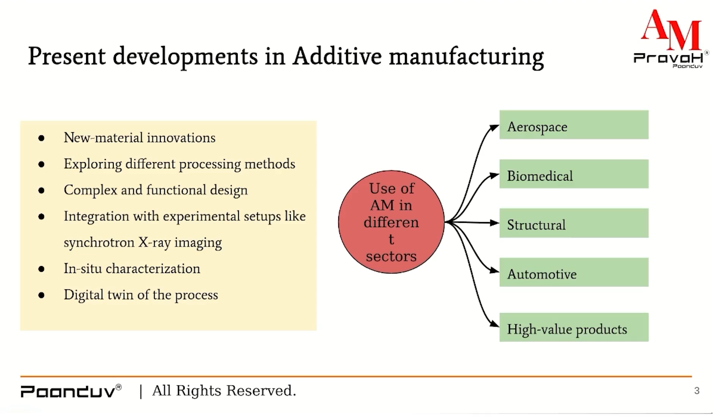In situ characterization, where again, this characterization business is a long drawn out process where you print coupons, you send it for printing. Characterization happens using different imaging techniques. Can we reduce that cycle time and try to do it in situ? The last one, which is slightly touching upon the process of simulations, is creating digital twins of the process so that you can reduce a lot of trials and errors that go behind the whole experimentation process and the real production development.

I will talk about a few interesting case studies, and of course aerospace has to be there. So this is a bleed air leak detect bracket, developed by Lockheed Martin and Oak Ridge National Laboratory in the US. It was a part of the engine for a fighter plane, and you can see the very complex part on the bottom right of the screen here. I hope you will appreciate the complexity of this particular part.

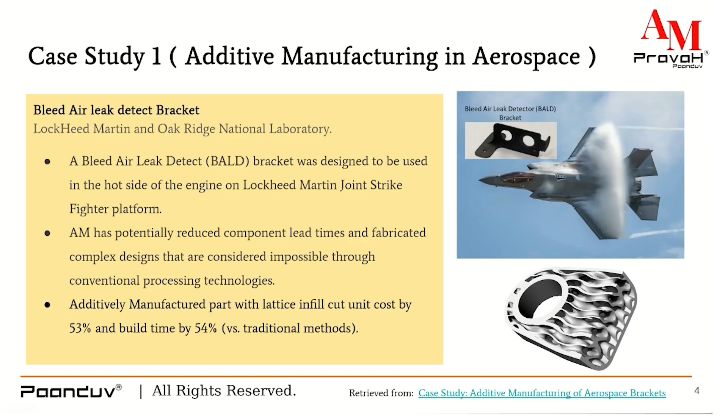And when this part was manufactured additively, the build time and the cost were both reduced by more than 50% when compared to the traditional methods. So this is a huge saving, not only from the cost point of view, but on the time point of view as well, while maintaining the structural integrity of the part. It's not that you are removing material and hence you are losing on the strength of this material. So these sort of complicated parts using very high performance alloys can be developed, can be printed using 3D printing process.

Another industry which, to my surprise, is heavily using additive manufacturing is the biomedical industry. Recently, there was a case with a friend, and even in tier 2 or tier 3 cities, when you go to a doctor and if you want a tooth replacement for X number of reasons, the dentist would recommend, would you like a 3D printed tooth replacement for your particular tooth?

And that has become a possibility, and it has reached the actual end user. So similarly, what we are showing here is a mandible reconstruction using titanium based alloy, using additive manufacturing. And then when you use traditional methods, there are certain ways of doing it. So when you do it using additive manufacturing, the implants are very patient specific. They fit well to the patient's bone structure right away, and there's not a lot of readjustment that is supposed to be done.

In fact, one of the very cutting-edge research areas that I saw recently at one of the other talks was, when a bone breaks from the middle altogether, then they're trying to find some additively manufactured materials which can replace the actual bone material in between, and that amount of porosity that you need inside that particular additively manufactured bone should be such that it should allow for the nutrient passage from the neighboring bones. So that is a level of complexity that we are reaching.

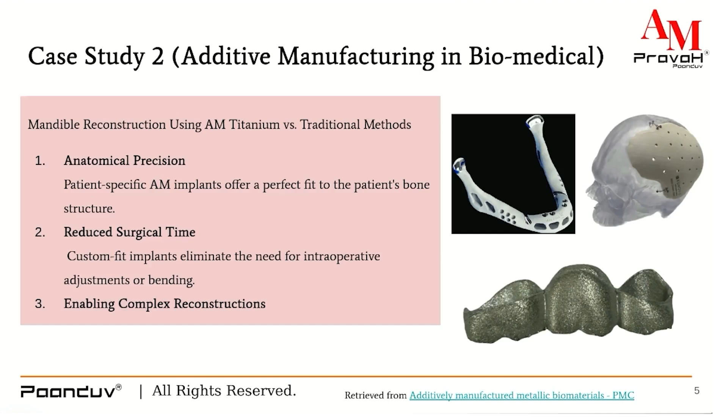Of course, it reduces the surgical time because the custom fit implant just fits right away. There's no adjustments needed later on. There's no bending involved, and hence the overall patient experience improves. And again, whenever there's complexity, it's a natural choice. And human body is quite complex. Each patient has its own complex bone structure, body structure, and so additive manufacturing is an organic choice for that industry as well, biomedical industry as well.

But again, I mean, it's not as mature of an industry as we can talk about, automotive or defense. So there are certain reasons why we are lagging behind when it comes to additive manufacturing and complete adoption of this technology. And one of the main reasons is lack of technological infrastructure, lack of characterization facility and instrumentation. I already pointed out that characterization and instrumentation is a very necessary part of any additive manufacturing part production, especially in the R&D phase and then also in the production phase.

There's lack of skilled personnel, lack of indigenous resources like powders. This is something that most countries all over the world are having problems with. Generating atomized powders using plasma, gas, or water is not a very straightforward process. The technology in itself is quite complicated. Therefore, it becomes important for everyone to investigate how they can indigenously develop their own powders that are spherical enough. Ignorance of using physics assisted tools for prediction.

A certain amount of confusion has been created in the market in the name of simulation softwares that can do additive manufacturing processes. But as we will go through this over the course of the next 2 days, our goal would be to make you appreciate that additive manufacturing is a very physics heavy process. You cannot simply ignore the physics and the engineering that goes behind manufacturing these machines, manufacturing these parts, and hence this understanding is quite critical in wider adoption of additive manufacturing across industries.

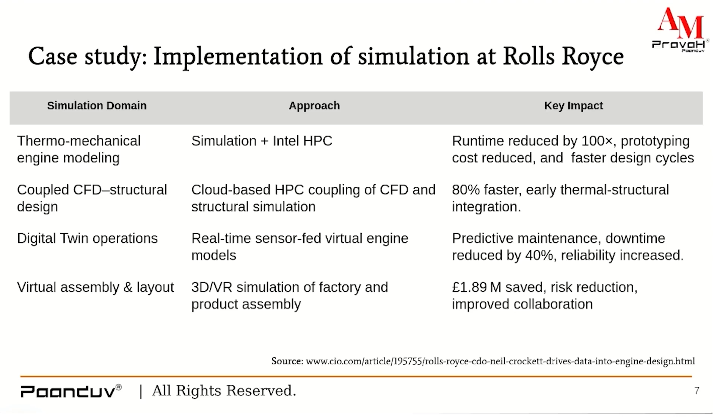And when I talk about numbers, they were saving 1.89 million pounds just on this single project, and they do probably tens of these projects per year. So overall, if I were to give you a synopsis of how the simulations are affecting the industry, Rolls-Royce has successfully used simulation, is currently using simulation-driven engineering, and there are thousands of companies using these sort of simulation software. NVIDIA and BMW heavily collaborated to drive the future of manufacturing by using very realistic digital twins and virtual worlds.

SpaceX is using simulations, high performance simulations in their Falcon rockets and Dragon capsules, and 50% increase in throughput just by using simulations. So all in all, this case is well established that when you are using simulations for improving your engines, for improving the aerodynamics, for the flow mechanics around your high performance parts, then why can't we use simulations in manufacturing as well, which are anyways ending up in the same high performing parts.

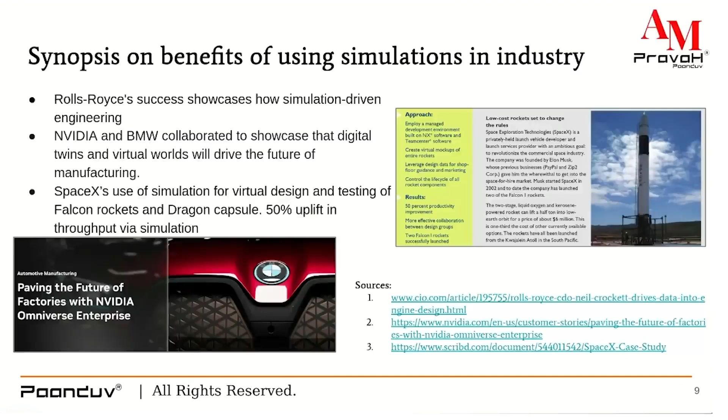It gives complete prediction of the process, complementary to in situ studies. It provides very in-depth 3D information, which is both spatial and temporal in nature. These LPBF processes, they could be operating at thousands of degrees. And it is very difficult to put any piece of machinery around those high temperatures and really look inside the porosity, inside the melt pools. And even if you can do that, you can do only as much. You can probably do few experiments in a year. You cannot be doing 100 experiments in a day. It reduces overall expenses on experiments, trials, and errors, and it adds to the value of the researchers with a complete end-to-end physics assisted solution in process modeling and microstructure evolution.

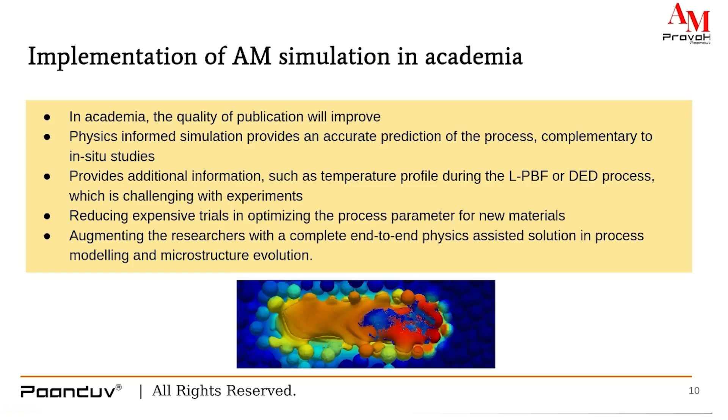Now, when we take this result to industry, the primary goal is money, saving money. The primary goal is saving wastage and reducing the run times. So AM simulations directly impact that. It minimizes the reliance on extensive experiments. It improves the overall throughput of your manufactured parts. It reduces component wastage, better optimizes your process parameters. Let's say there are 100 process parameters that you want to change for a new material. Just imagine the amount of complexity, how many permutations and combinations you will have to go through to really optimize and come to the right set of process parameters.

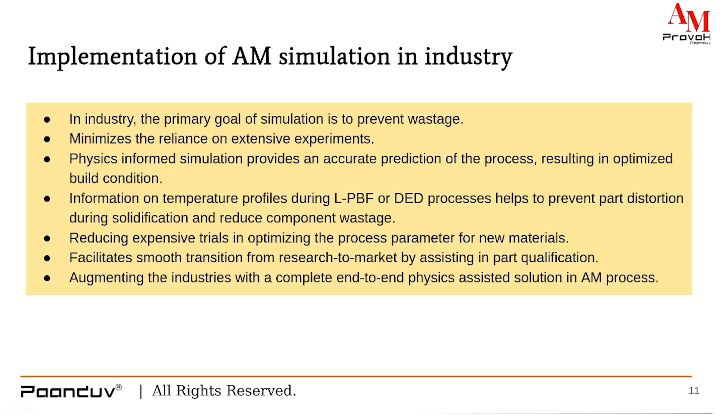And then also this simulation software, this is a very critical point, and touches upon the collaboration that I earlier talked about. It helps in a smooth transition from something that you have developed in your research lab and takes it to the market in a better manner, because it assists in part qualification and certification as well. So overall, not just academia but industry can also directly benefit from these sort of simulation tools.

There are a few myths about simulations. I want to clarify them before moving forward. Simulations are not a replacement for experiments. They are just a complement to experiments. So let's say you are doing 100 experiments in a year. Please don't think that simulations are going to remove all 100 experiments.

What simulations can do are two things. One, you may still do 100 experiments, but another 1,000 virtual experiments in a simulation software. So total you will end up with 1,100 experiments. Or alternatively, you can do 50 experiments still. Remaining 50 you can do with simulations. And based on the understanding from these simulations, you can devise your experiments in a better manner.

But in no scenario are we getting rid of experiments altogether. Another myth: all simulation softwares do the same thing. No, that is not true. They operate at different levels of accuracy. They use different methodologies, and they have different goals for the customer.

A simulation will always produce a precise, or I would rather say a correct, answer to the problem. No, that is not true. Due to the lack of certain properties, lack of process parameters, or just inherent inaccuracies in a simulation software, you may always end up with a certain error.

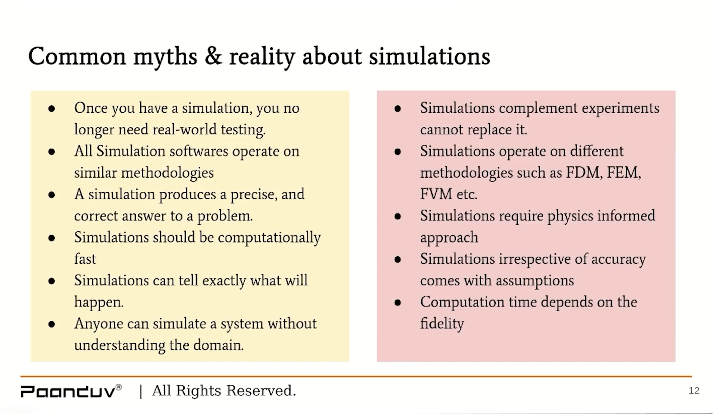This is an informative slide for those of you who are interested in any sort of simulations. Out of many approaches, and there are newer ones as well, the very classical approaches to solve an equation of physics are the finite element method, finite volume method, or finite difference method. Specifically, in melt pool dynamics or additive manufacturing problems, you're not only solving the three classical equations, which are conservation of energy, conservation of momentum, and conservation of mass, you're also dealing with phase change. You're dealing with multiple fluids simultaneously. You're dealing with a lot of laser and optical physics, and all this is happening in a very coupled manner.

You are dealing with solidification, melting, vaporization, keyhole formation, surface tensions, and electromagnetic forces when we talk about wire arc additive manufacturing. So these things can be handled by computational fluid dynamics quite effectively, given that you appropriately modify the equations and append the new equations as needed for the additive manufacturing process.

So, in very layman terms, they all use some sort of elements. They all discretize your entire volume into smaller volumes. For example, finite element uses triangles. Finite volume could be using hexahedrals or triangles. Finite difference uses very regular grid points; unstructured meshing is typically not appreciated with finite difference methods. The flexibility of discretization also varies among the three methods.

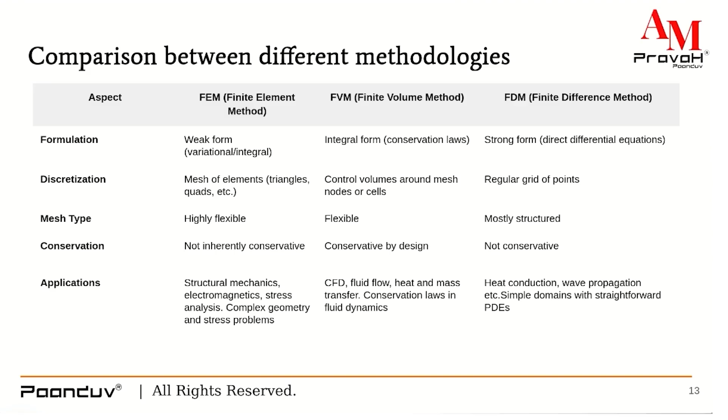When it comes to finite difference method, it can again handle slightly simplistic problems such as heat conduction, wave propagation, but also used in the CFD industry. So next time when you're considering using a particular AM simulation software in your additive manufacturing research, try asking that particular person or that company as to which particular technique they are using. Are you using FEM? Then you know what you can do with FEM. There are certain limitations. If they're using FDM, then you know what they can do. And if they're using FVM, then you know what they can do. So that sort of information should be asked.

So that was all on the melt pool dynamics, but a big chunk of additive manufacturing research goes into microstructure simulations, grain morphology, and there are many methods for that also. Monte Carlo Potts method, CA, which is cellular automata, and phase field methods. Again, they all try to address the microstructure aspect, but with the increase in accuracy of one method, its performance significantly goes down. So let's start with the phase field method, which is the rightmost one.

Its PDEs, or the governing equations of microstructure, are derived from a free energy functional. The time scales are very physical time scales, the real process that is happening. Computational costs are very high; not high, they're extremely high. And that is one of the biggest points of discouragement as to why phase field modeling cannot be used beyond a few microns around the nucleation of the solidification field. Interface accuracy is quite accurate, and this is on paper the most accurate sort of method. But when it comes to real application, industry, or research, the limitations on the computational cost are significantly high to make any real value out of it.

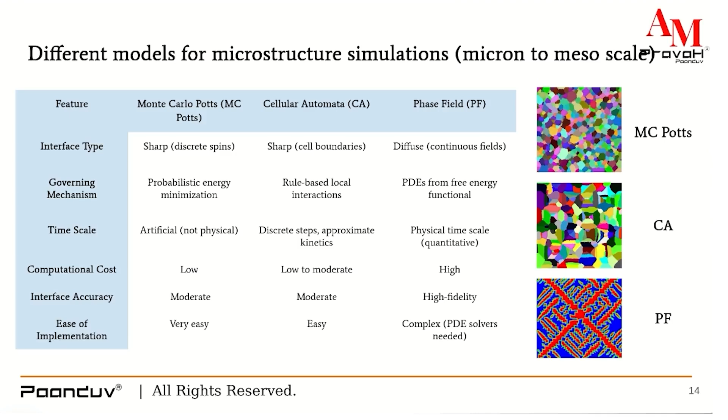Cellular automata and Monte Carlo Potts are the two remaining options apart from phase field, which have low to moderate computational cost. Monte Carlo Potts uses probabilistic energy minimization, whereas cellular automata uses rule-based local interactions. The interface accuracy is again moderate in both the cases, and ease of implementation is again easy in both the cases. So again, when you go to a vendor and ask them how are you predicting your microstructures, they would either tell you Monte Carlo Potts, cellular automata or phase field. And at that time, you need to evaluate what are your needs, what sort of computational power you have, what are your goals, and based on that, you can select a vendor.

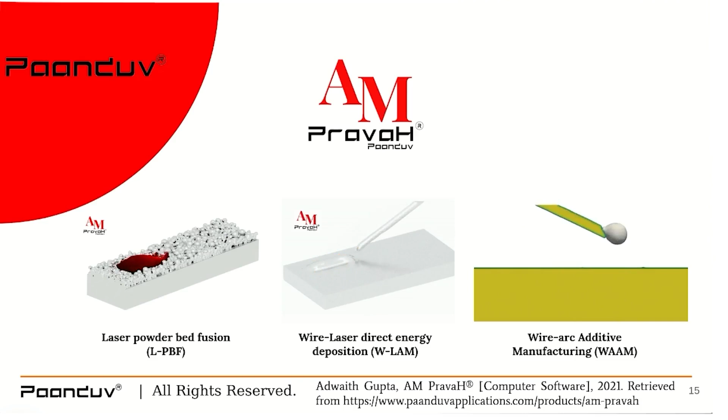So having said that, I'm very happy to introduce AM PravaH, which is going to be the center stage for the next two stages. This particular piece of high fidelity physics based simulation software is the world's first end to end dedicated simulation platform for additive manufacturing. And as we go through this set of presentations, you will see why I call it world's first and why it is end to end. In fact, there's an entire presentation dedicated to that. So currently we are doing laser powder bed fusion, we are doing wire laser directed energy deposition, and wire arc additive manufacturing is something where we are seeing amazing results. And we are very soon going to implement this in our regular distribution of the software.

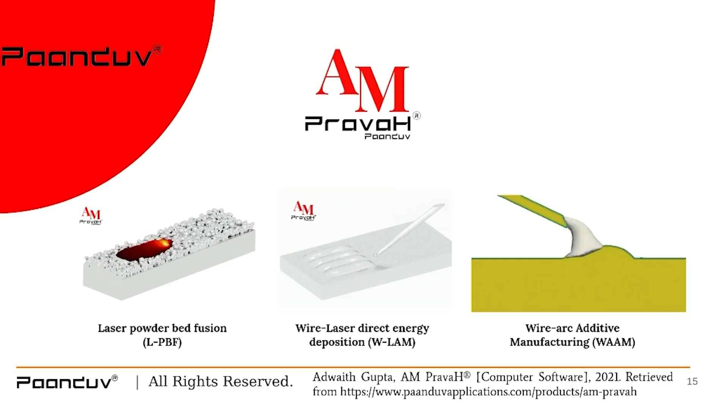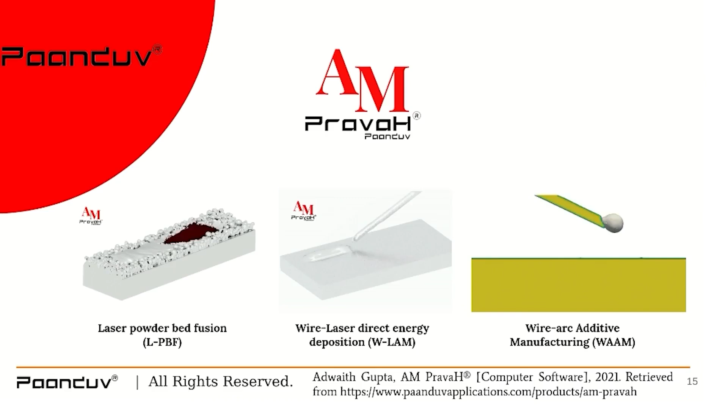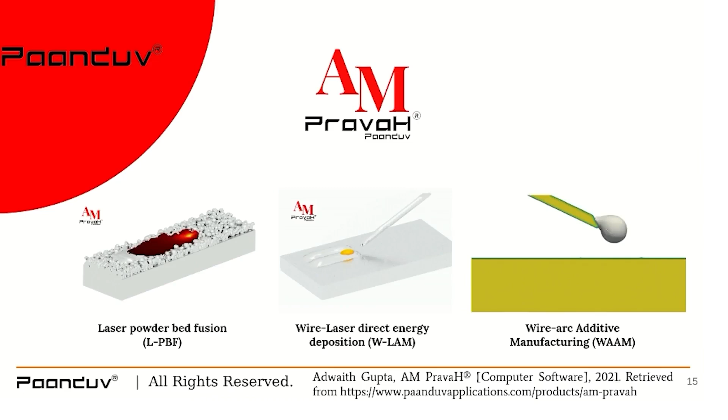In this particular slide itself, I'm sure you will be able to appreciate the fidelity, how well the physics is captured in all the three processes. In fact, the wire arc additive manufacturing, this is something very new, very close to my heart. So you can see that the droplet dynamics is quite accurately captured. We have not just taken droplet frequency artificially. The droplets are actually and organically developed, created, because they're sitting in an electromagnetic force field, and accordingly, because of that particular arc, the energy distribution of that arc is causing the melting of the wire and creating a melt pool and a bead on top of it.

Some of the very salient features: no matter how much I talk about the software, there will always be more to say, but to summarize the main features, this is multi-phase. What I mean by multi-phase is, most simulation software, in fact all simulation software to the best of my knowledge in the world, are currently operating in one phase or two phase, which means when they're simulating an additive manufacturing process, they are doing the solid alloy, they're simulating the molten alloy, and that's it.

But then, those of you who come from the AM field would immediately identify that there are two more phases involved which need to be simulated, which is the alloy vapor or the metal vapor. Typically happens after 3000, 3200 Kelvin. And then there's a fourth phase which plays a critical role, which is the shielding gas. Now, when a particular solver does the solid and the molten phase, then you have totally neglected the effects of the vapor phase, which is very critical in forming the keyholes, in giving you the correct information about the pores. The flow of the shielding gas on top also significantly affects the amount of defects you will see in a particular part.

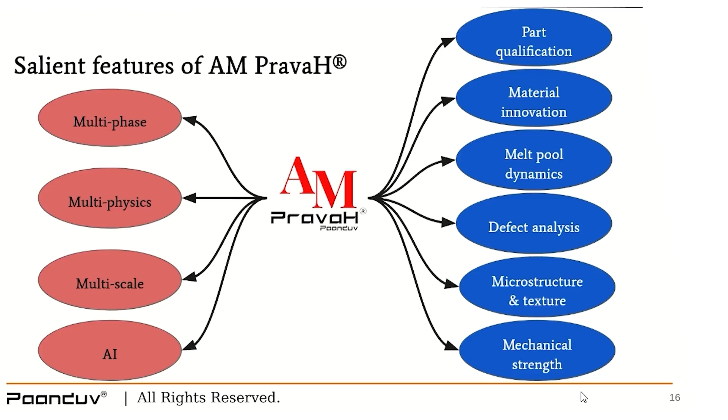Okay, so we keep saying that simulations are good, but unfortunately or fortunately, the fact remains it's the money that matters in the end, whether it is academia, whether it is pure research lab, or industry for that matter. Everyone wants to do good work. Someone for producing better parts, someone for producing better research papers, someone for doing genuinely new innovation. But no matter what field you belong to, you always want to keep the costs low and do it at the lowest possible cost.

So we did some very tentative calculations as to what a single part qualification would take for a particularly new metal. It would cost you around 6 lakh to 9 lakh rupees, and I will show you what sort of experiments would be included, especially if it's an aerospace or defense sort of part. With AM PravaH, this cost can be reduced significantly, up to 65 to 70%. And there are some assumptions that are made in presenting these figures.

The assumptions are moderate to high end AM part qualification. So let's say you're going for aerospace, defense, or medical application. We are assuming that you have access to a local lab and testing facility within your office, within your workshop. We are assuming that each test includes associated labor, extensive sample preparation, and high-end equipment use. So we have already included those costs as well in this data analysis.

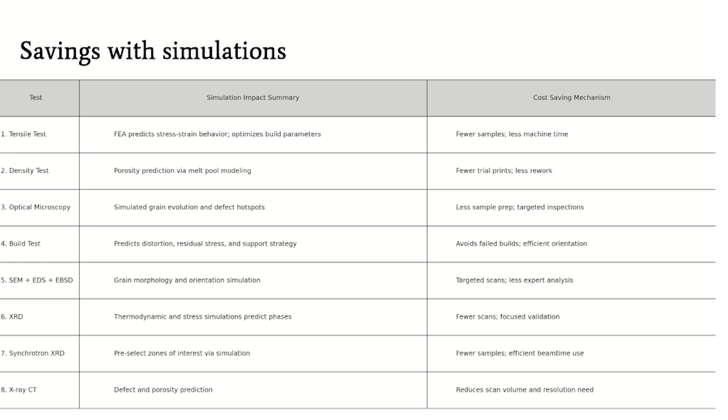Okay. So what is the benefit of using PravaH? End-to-end simulation solution. We are cutting down 67% of the cost. The chance of failure is reduced down to 10%, it saves experimental trials and characterization. We are committed to making it a virtual twin for the AM process, and just appreciate the scales at which we are operating. We are going all the way along the process chain. The additive manufacturing chain starts from powder manufacturing, and it goes all the way to the part scale, the real build.

So we are starting with the atomization process itself, where powder can be manufactured. It's a supersonic inert gas atomizer. Then that powder is used to prepare a powder bed. We are using discrete element method, very accurate solid dynamics, solid mechanics, collision mechanics to simulate this sort of powder distribution,

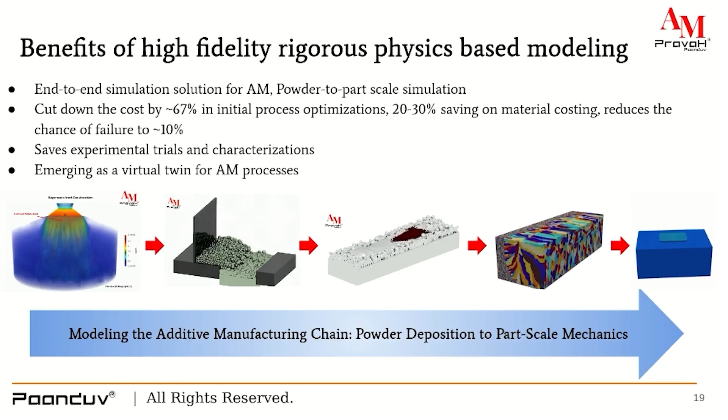followed by computational fluid dynamics, which is the melt pool dynamics, followed by Monte Carlo Potts simulation to predict the microstructures, the grain morphology, and then followed by finite element methods to do part scale simulations. So basically, different techniques at different scales that are applicable and most suitable are captured in this particular piece of software.

We are very happy to have some very good users of our software. Some of them will be talking about it as well, and we hope to see a lot of good work coming out of the software, exploring those dimensions of the software which even we have not explored yet. And we'll all try to showcase and cover, because there's just so much to cover. We are all experts in different aspects of the software. Thank you.